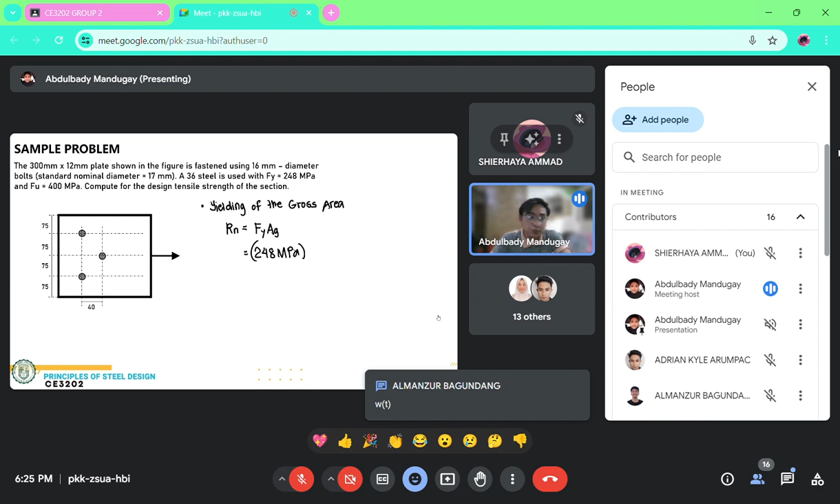Though wala tayong gross area na figure, pero given kasi yung dimension niya. So ano yung gross area natin dito? If ma-recall pa last meeting, ano magiging gross area natin? Anybody? Okay, the width times thickness. Or that will be the total width. That's 300 multiplied by 12. So lagyan na natin dito 300 mm by 12 mm.

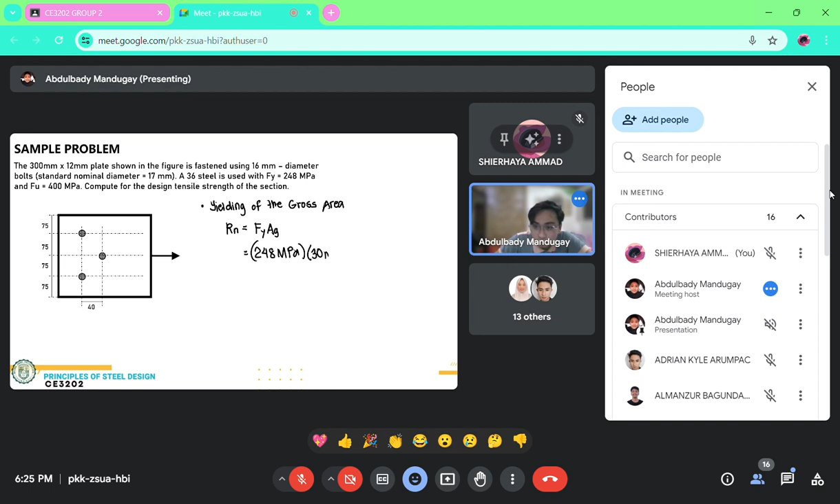Okay, so we have 248 times 300 times 12. That will be 892,800. Ano magiging unit niya? Ang MPa, this is in newtons per square millimeters. Magmumultiply tayo ng square millimeters. So magiging Rn natin is actually a force, no? Ito yung Rn natin, that is actually a force. Ang unit ng force natin is magiging newtons. Ngayon, para ma-reduce natin or mapaliit natin yung significant figures, gagawin na lang natin kilonewtons. So that will be by dividing the answer by 1,000. So this is 892.8 kilonewtons. Okay. Now, this is not yet our final answer.

Bakit man? Kasi this is just yielding of the gross area. Wala pa tayo sa yielding or yung failure ng ating net area. Okay, so to solve for the failure ng net area natin, we have to consider na tatama na yung failure natin doon sa ating mga bolts. Ngayon, ito lang yung issue natin when it comes to solving the capacity based on yielding of the net area. Ang dami nating pwedeng masolve. Okay? Bakit ang dami nating pwedeng masolve? Pwede kasi na ang failure natin is like this.

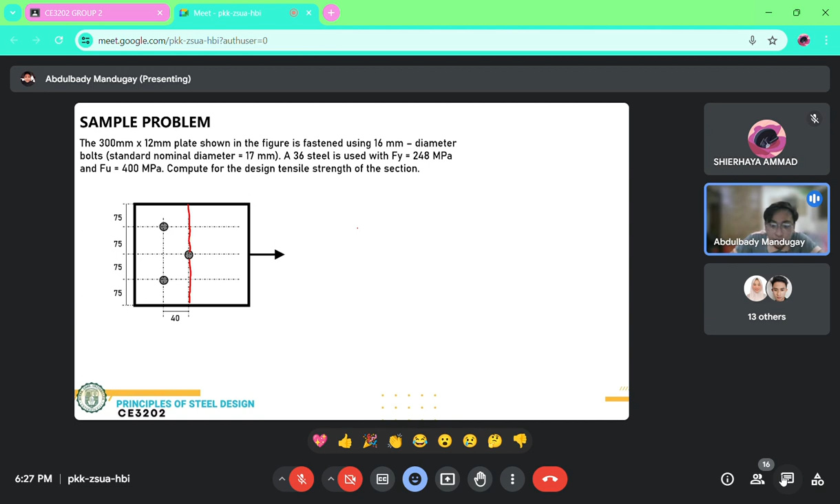Okay, yan yung magiging failure natin. So pag yan yung failure natin, magiging ganito yung detached part. Okay? So andito yung force P natin, Rn. Ganyan yung magiging itsura niya. That is one failure. Ano yung isa pang failure? Pwede na yung path ng failure natin is ganito. Mag-crack siya pa ganito, mag-stagger siya dito, and then mag-straight siya dito. That is another one.

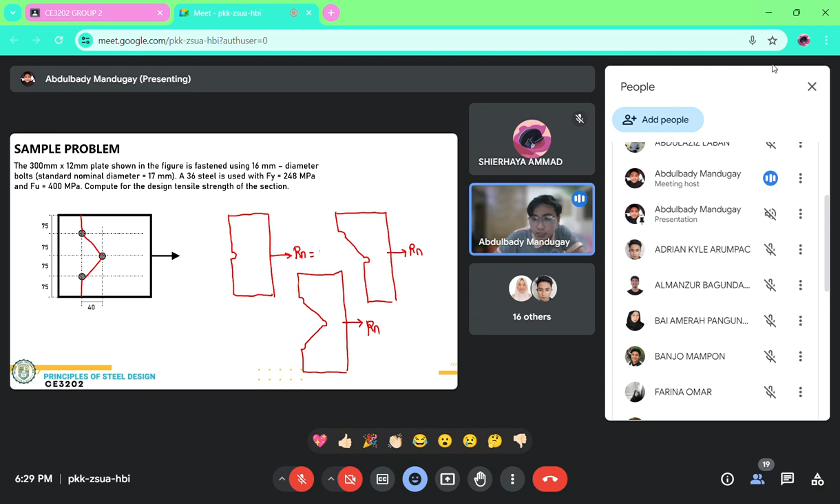Let's say for example, for this one, when we calculate it, the capacity that comes out is 4,000. Here, the capacity that comes out is 4,100. Here, the capacity that comes out is 3,900. Just hypothetically. Which one wins there? The one you should pick is this one, the smallest value. Because if you declare this as your capacity, then it will fail here where you didn't check.

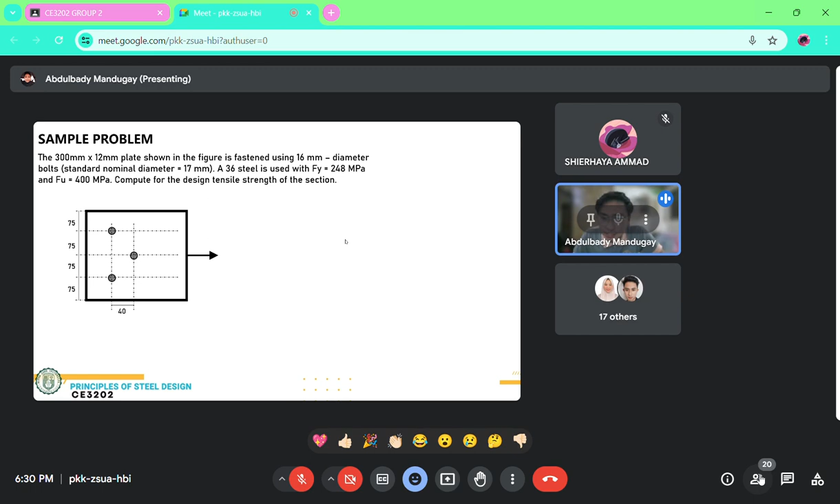For this example, let's just try to solve all three cases, then we compare. Okay, so we will call this yielding of the net area or our effective area. Net area is almost similar to effective area except that effective area is multiplied by the shear lag factor. The shear lag factor, if you recall the table from last meeting, that's our basis for the shear lag factor. But since we are dealing with plates, automatically our shear lag factor will be 1.

So our shear lag factor is not a problem. But if our cross-section is different, like channels, unequal angles, equal leg angles, hollow structural steel, whatever, then we will check the table for our shear lag factor. We'll discuss more on the shear lag factor once we reach the point where we need to check it. But since we're only dealing with plates, automatically our shear lag factor equals 1.

Now, our first failure is... wait, can we consider this as our failure pattern? The answer is no, we cannot consider this. Why not? If we cut that and draw our detached part, see, there's a bolt included whole.

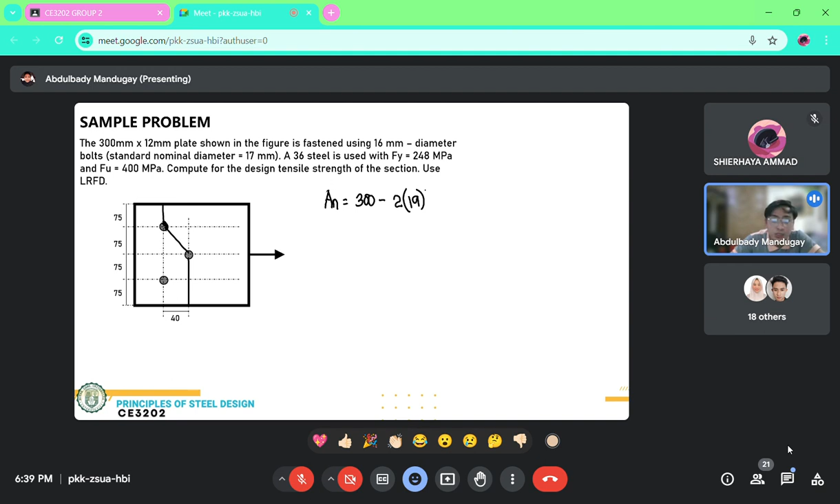How do we consider this? Since it's not the whole thing, I won't complicate it. Simply put, you just subtract directly however many bolts or holes are passed through. So we will be subtracting 2. We have 300 minus twice 19, that's the effective diameter or the nominal plus 2, and then you multiply by the thickness.

Okay, wait class. Hello, can you hear me? Okay, 300. Let's wait. So our net area will be net width multiplied by thickness. Our net width will be 300, our gross width, subtract however many holes we pass through, that's 2 in our pattern, this is 1, this is 2.

So minus twice 19. Why 19? Because that's our effective diameter, taken from 17 plus 2, plus the stagger. What's our stagger? That's S squared over 4G. Our S is 40 squared over 4 times 75. Don't interchange them, our S is the pitch, our G is the vertical.

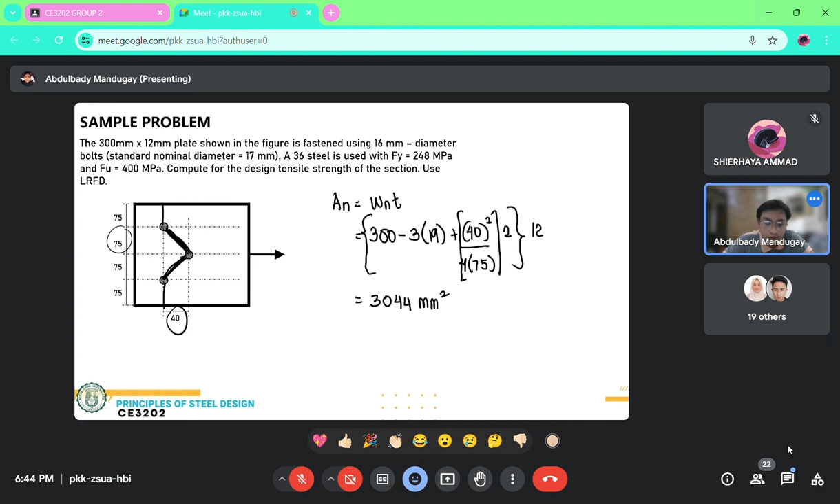Double check. Okay, 3,044. Eh, yung maximum natin na AN is 3,060. So this is less than our AN max, so therefore safe siya gamitin. So we will be using AN that is 3,044.

So baka mamaya, pag try nyo ng case 1, nanalo si maximum net area. Pag check nyo ng case 2, nanalo din si or nag-govern din si maximum net area. Ay, hindi ko na i-check sa case 3 na baka magmali. So that is why, if hindi nyo sure kung alin ba sa tatlong cases yung may pinakamaliit na value, mas mabuti solve nyo na lang lahat ng cases na possible.

Kaya nito, 3,044 is smaller than yung maximum net area natin, so we have to make use of this. So if that's the case, our AN, which is also our AE, kasi nga yung U natin is 1, is 3,044 square millimeters. So with this, we can now compute for our RN for case 3, that is FU 400 multiplied by AE 3,044.

Divide lang natin ng 1,000. This is 1,217.6 kilonewtons. And yung RU natin, i-multiply lang natin to ng 0.75, that is the reduction coefficient for yielding of the net area. So that's 913.2 kilonewtons.

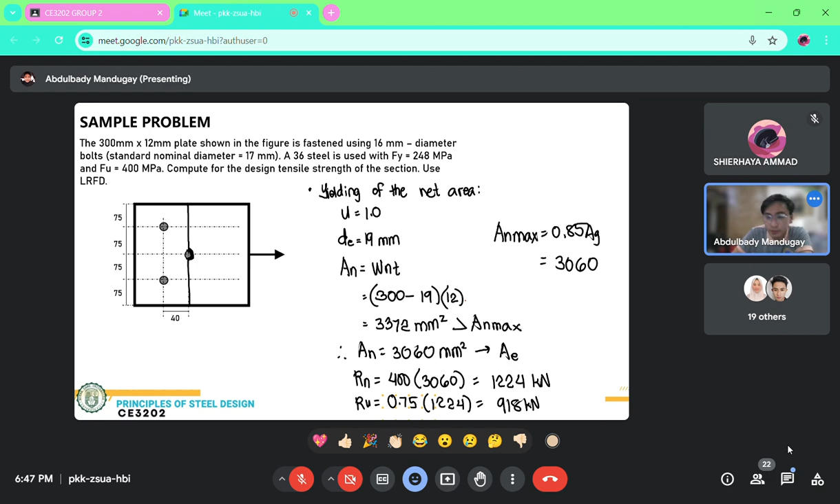Yung isa is 918, ayan, so 918 and 913. Ngayon pipili tayo alin sa tatlo yung capacity niya, kasi hindi naman pwede na dalawa yung sagot natin or tatlo yung sagot natin.

Parang ganito, ilan ang kaya mong kargahing sako ng bigas? 5 or 6? Hindi, 5 or 10? Yun, 5 pati 10 kaya ko. So ano talaga yung capacity mo? Pangit ng sample ko, pero parang ganun.

Meron talaga siyang limit. Ngayon pipiliin natin doon sa lahat ng values na na-compute natin yung magiging limit ng ating system or ng ating section. Ang clue natin is

kasi hindi tayo naggamit ng inequality sign. If gumamit tayo ng inequality sign, magiging obvious sana. Pero if hindi tayo gumamit ng inequality sign, kagaya nito, nag-equal sign lang tayo, then we have to analyze. If yung gross area, ang kaya niya is 803, si net area, sabi niya ang kaya ko is 918 or 913.

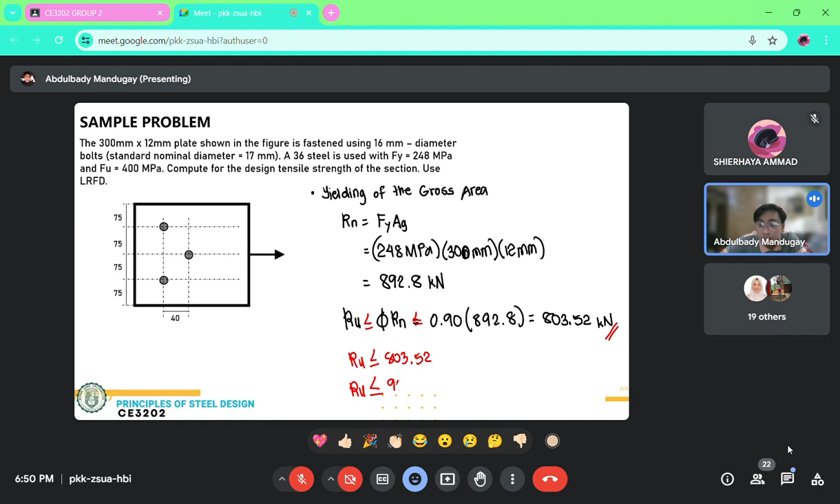So RU should be less than or equal to 803.52. In the same case, for the net area, RU is less than or equal to 908 and RU is less than or equal to 903. It should be less than or equal to that 803 value. These two values are not less than 803, so they don't govern. With that, our final answer should be 803.52.

So when asked for the design strength of the section, you have to enclose only one final answer. If you box everything, that's wrong. Be clear, because during the exam people just box everything without really understanding the question. If asked for design strength, you have to compare all the values, then choose which one is really the design strength of the material. So in this problem, it's 803.52.

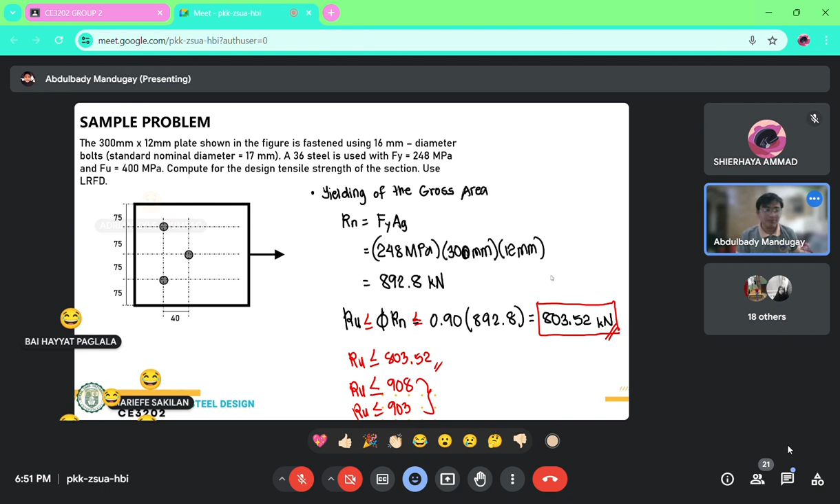Okay, another sample problem. Let's try this time, it's not a plate.

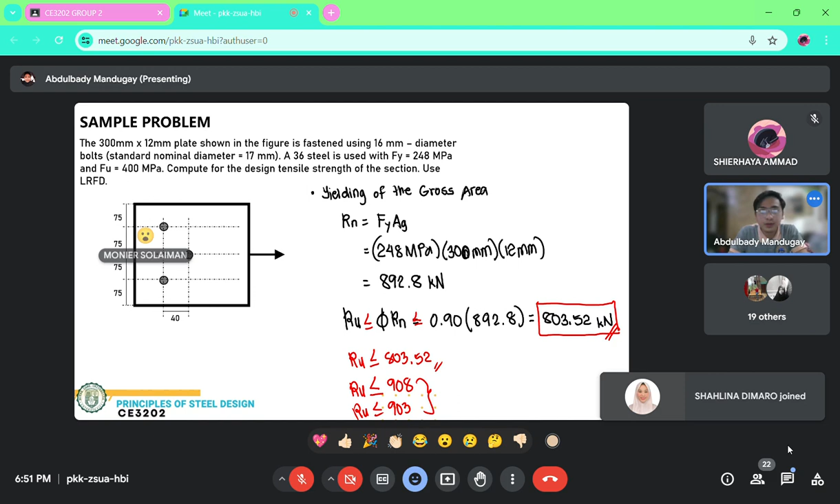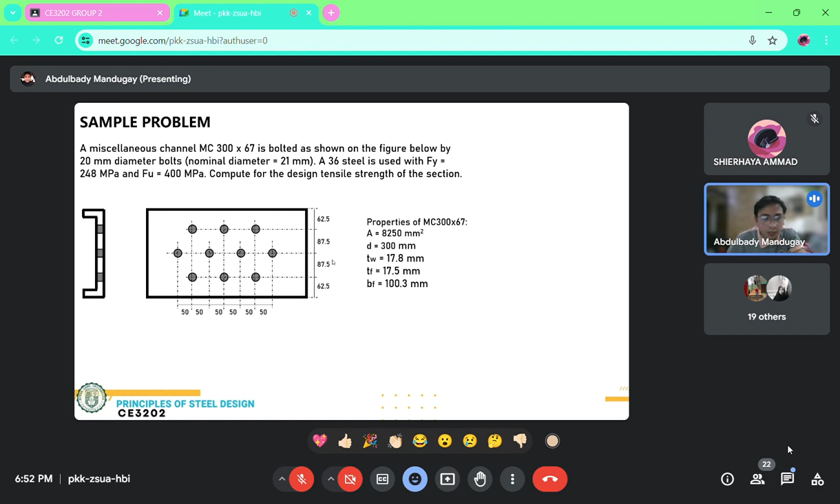We have here a miscellaneous channel 300 by 67, bolted as shown in the figure below. There's a bolt with nominal diameter given as 21 mm. If you notice, the nominal diameter is always larger than the exact diameter of our hole, not the bolt. Is that clear, the bolt and the hole?

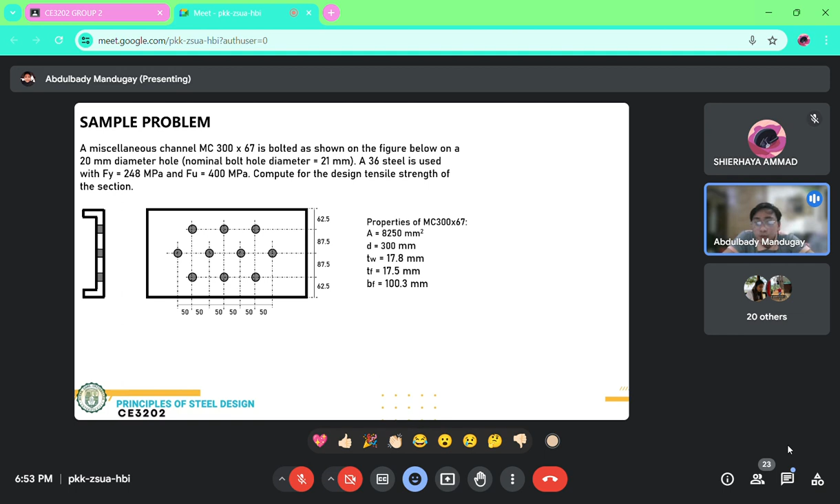Let's work on this. Figure below shows a 20 mm diameter. So the hole is 20 mm, but the nominal hole is 21 mm. So our effective diameter, that's 21 plus 2, will be 23. Let's write that down. Effective is 21 plus 2, that will be 23 millimeters.

Compute for the design tensile strength of the section. To compute for the design tensile strength, we have to consider two types of failure: the failure at gross area and the failure at net area.

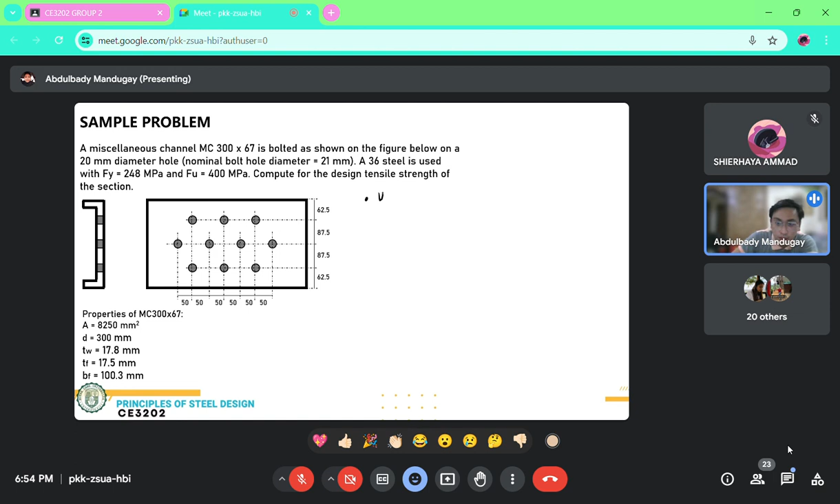Let's start with the failure at the gross area - yielding of the gross area. For the yielding of the gross area, let's first compute our gross area.

This is equal to, given - that's 8,250. Check that too, in case you need to compute the area since it's a channel. The dimensions are given so you compute it, but it's actually given - the area of the miscellaneous channel is 8,250 square millimeters.

So this is now our AG, so we can now solve for our Rn. That is equal to Fy - what grade? A36 again, 248 MPa multiplied by 8,250 square millimeters. So our Rn, let's just divide by 1,000 to get kilonewtons - that's 2,046 kilonewtons. So our Ru is just... it wasn't mentioned, but let's just make use of LRFD for this one.

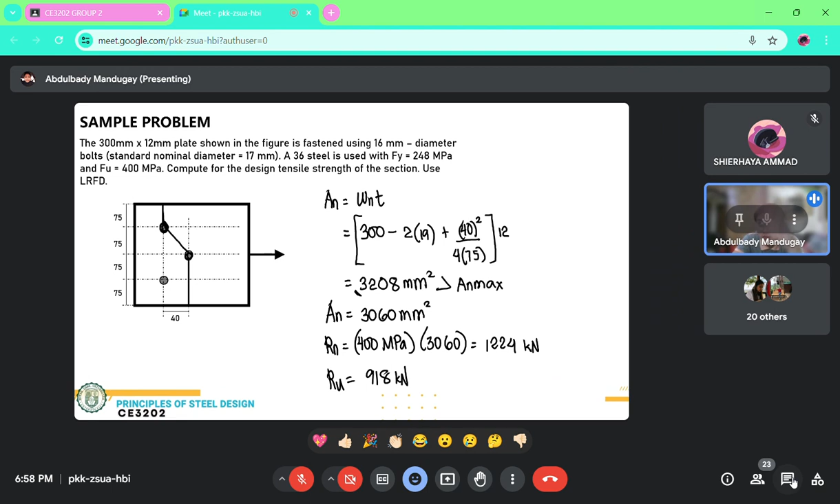Example is kanina, di ba? Ang nag-govern is yung tatlong tinamaan ng failure pattern natin or failure route natin. Dito, that's 918. Tingnan nyo yung ating net area na hindi AN max. 3372. Dito, 3208. The more na mas marami kayong matamaang holes or bolt, the more na liliit yung inyong net area. Kasi technically, ganun talaga, di ba? Kasi isasubtract natin yung area ng hole, yung voids natin. So, ibig sabihin, kung tatlo, mas maliit yung net area natin.

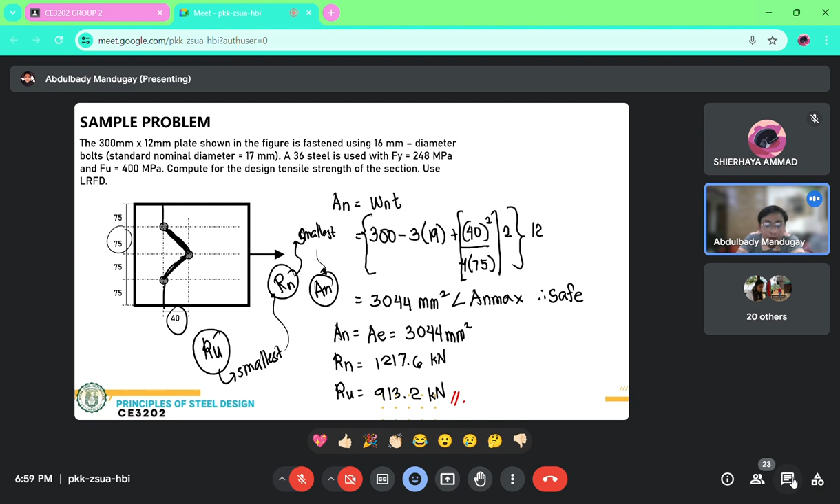Bakit ba hinahanap natin yung pinakamaliit na net area? Kasi ang gusto naman natin makuha na RU is the smallest, which magta-translate din siya sa RN na gusto natin na RN is also the smallest. So, kung gusto natin ng smallest RN, we have to make use of the smallest AN. Kasi directly proportional lang naman silang lahat, di ba?

So if that's the case, we can just assume that the failure will run through like this, yung mag-govern na failure. So, ang mangyayari, yung AN natin will be the total width, that is 62.5 plus 87.5 times 300 - diyan pala sa problem. Okay, so net width times thickness tayo. Net width natin, that is 300. Magbawas lang tayo ng tatlong effective diameter, which is 23 mm. Hindi 21, but 21 plus 2, so that is 23. So tatlong 23 plus tayo ng S squared over 4G.

Yung S squared over 4G natin, dalawa. Isa dito, isa dito, pero parehas yung value nila. Kasi for this one, ang S niya is 50 at ang G niya is 87.5. For this one, yung S niya is 50 din at 87.5 din yung G niya. So, ang gagawin ko is S squared over 4 times 87.5. Doblehin ko na lang para mag-8-8. Magtawa kayo, I-check ko, sino nagtawa? Ayan, may nagtawa. Very good.

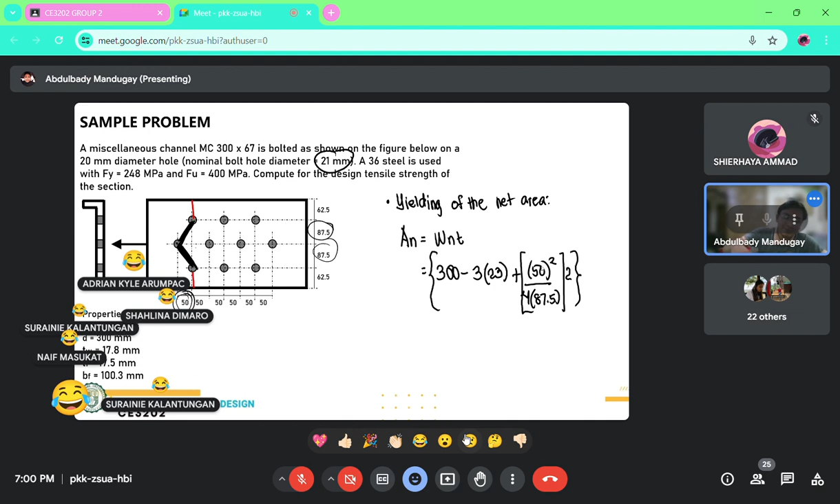So, times thickness. Ano yung thickness given sa problem? 67? Hindi. Dito pala makita, properties daw ng section natin. Okay, anong gagamitin natin na thickness dito? Check natin yung properties, i-breakdown natin. A refers to the area, of course. D refers to the total depth, that is this one. Ito yung D. We have the thickness ng web.

Okay, ano yung web? Kung meron kayong I-beam, mas madali siyang makita. Ito yung web. Okay, itong nasa taas, ito yung flanges. Okay, which is the same case din, kung maging channel ba siya, maging T siya, ganun pa rin ang web at ganun pa rin yung flanges. So, ibig sabihin, ang web natin dito is this one. At ang channel, ang flanges natin is this one. So, ibig sabihin, ang thickness ng web natin is 17.8 and ito yung gagamitin natin if we are to solve for yielding ng net area.

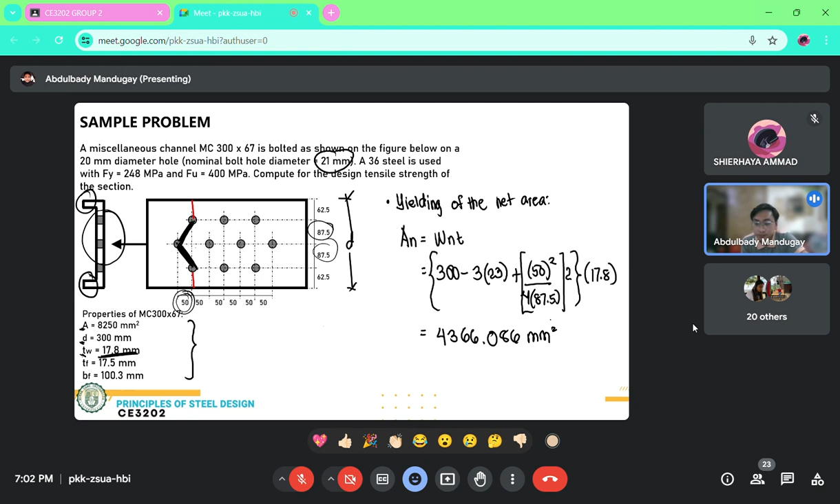So, we have yung net width natin, multiply natin ang thickness ng web, that is 17.8. So this is times 2, okay, times 17.8. So this is 4366.086 millimeters squared. Okay, double check lang. So, this is now our net area.

Okay. Do we have to check dun sa maximum net area natin? Hindi, kasi hindi naman to plate. Channel naman to, so safe na siya. Kung ano yung makuha natin na net area, that will be the net area na gagamitin natin. So, if that's the case, masasolve na natin si Rn natin.

Which is FU-AE. Now, here's the thing. Si AE pala, wala pa tayong value ni AE. AE is equal to shear lag factor multiplied by AN. Ngayon, si shear lag factor, titingnan natin sa table kasi hindi na siya plate. So, if we are to go back sa shear lag factor natin...

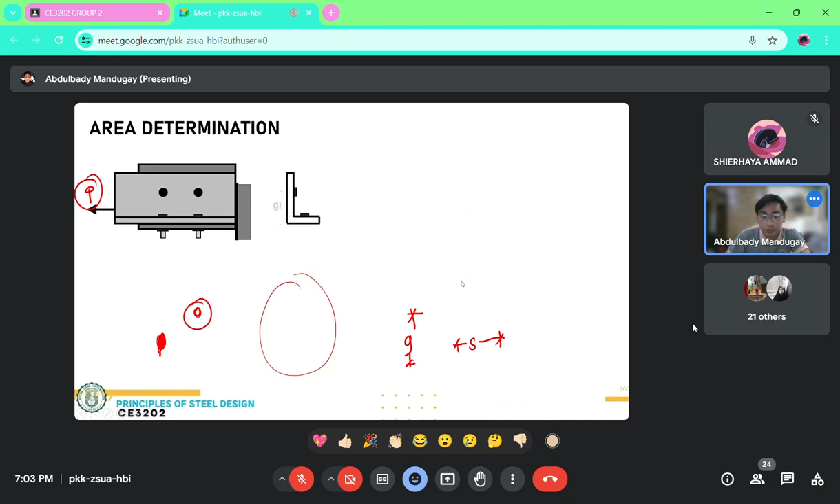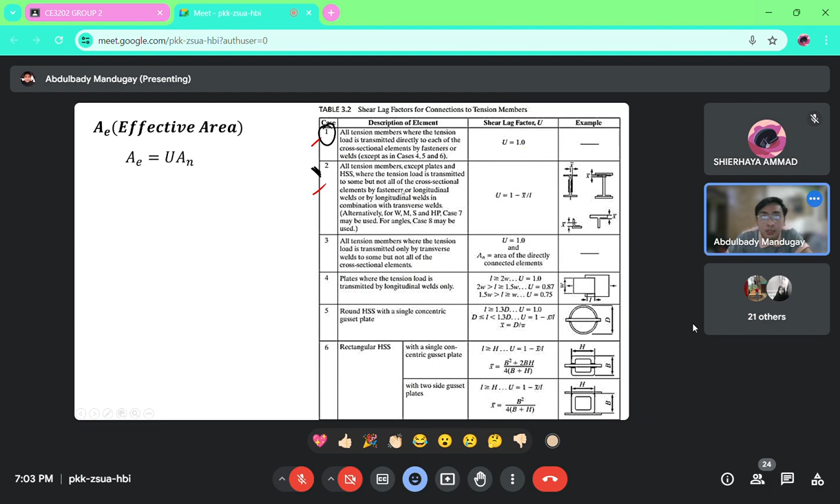Ayan. Hindi siya magpo-fall kay case 1. Dito siya, pwede siya mag-fall kay case 2. Kasi all tension members yung pinag-uusapan natin, except plates and hollow structural steel, where tension load is transmitted to some but not all cross-sectional elements. Which is, ito yung case dito. Kasi transmitted siya to some, doon lang sa kanyang web, but not to all. Kasi hindi siya transmitted sa flanges. Meaning, gagamit tayo ng formula na U is equal to 1 minus barred X over L to check doon sa case 2.

Now, this is another long story. Hindi pa yun yung focus natin ngayon. For the sake of this problem, I'll just give you a value of U. Now, let's just make use of U is equal to 0.85. Okay, so this is given, ha? Saka na natin siya i-compute pag nandun na tayo sa shear lag factor. Okay, for this one, let's just make use of U is equal to 0.85.

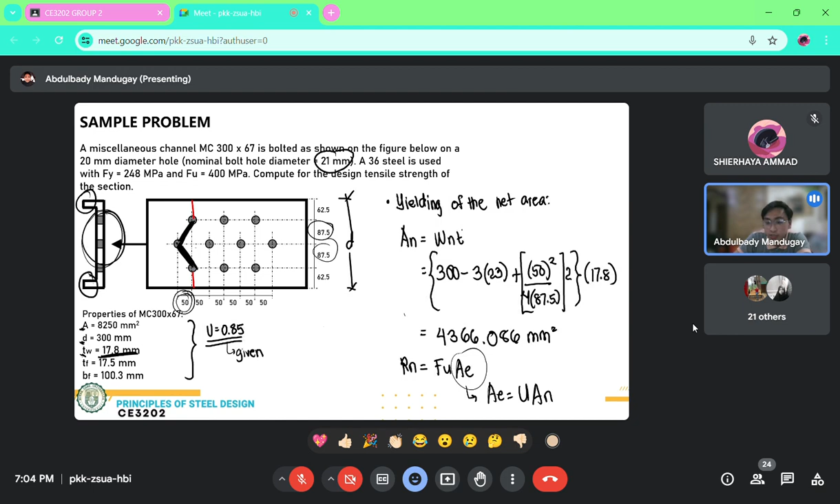So, ang AE natin will be 0.85 multiplied by our AN, that is 4366.086. So that is 3,711.173. Okay? So try to compute Rn and try to compute Ru using ASD pa rin.